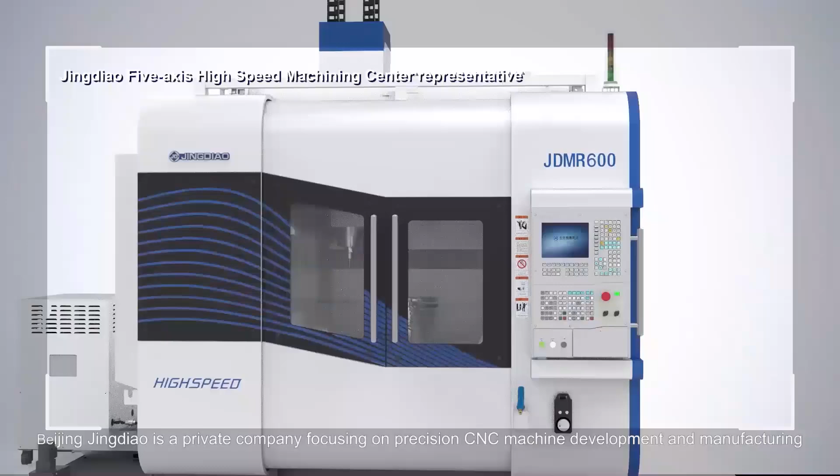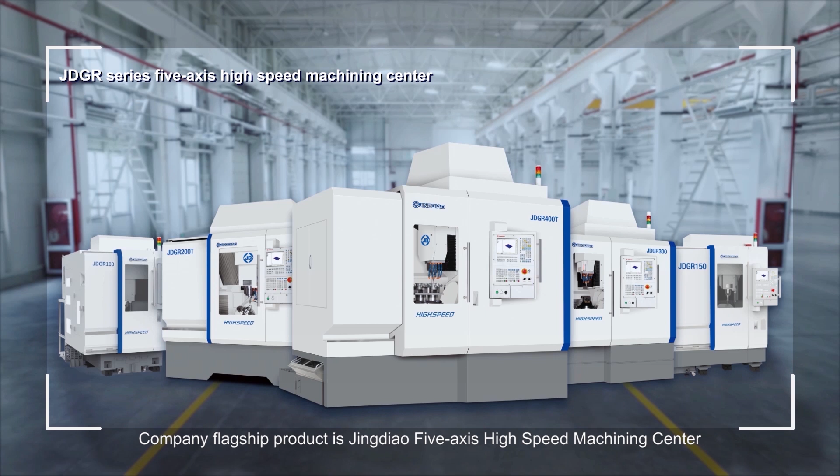Beijing Jingdiao is a private company focusing on precision CNC machine development and manufacturing that was certified as National High-Tech Enterprise in the first batch. The company's flagship product is the Jingdiao 5-axis high-speed machining center.

Beijing Jingdiao Group was established in 1994. Its headquarters locates at Beijing Zhongguancun Mentougou Science Park. Staff number exceeds 4,800, of which over 900 researchers work in the R&D team and over 1,200 engineers work in the technical service team. After over 20 years of tireless efforts, the company has built a well-developed system including R&D, production, and sales. The group was entitled National Enterprise Technical Center in 2019.

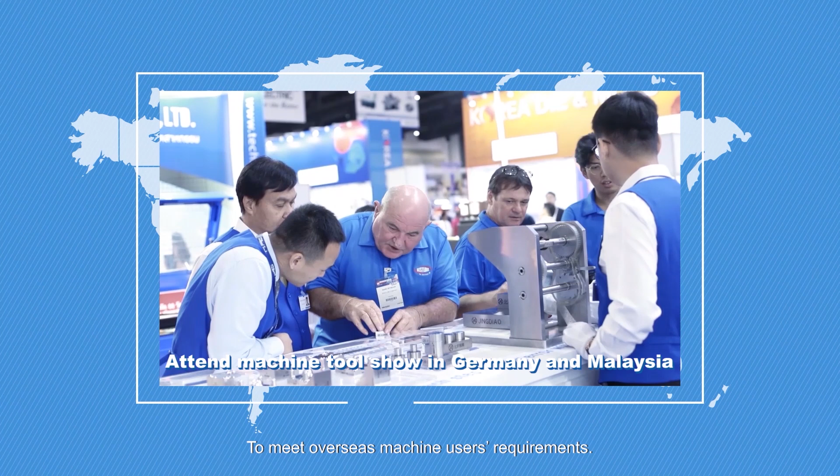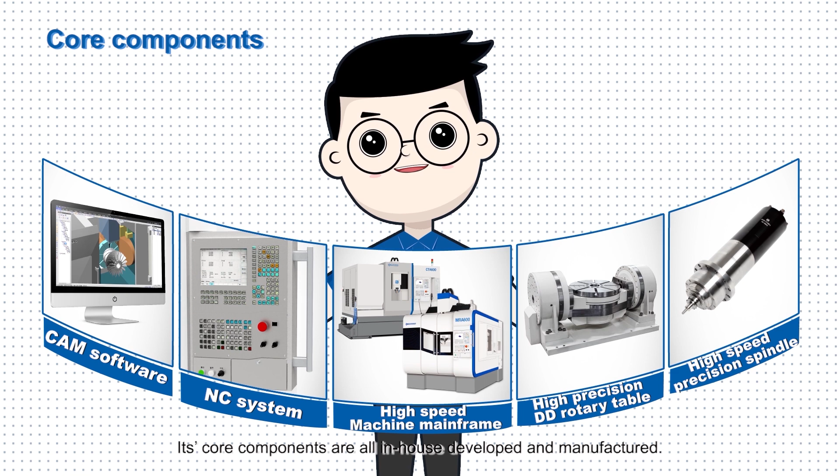The Jingdiao high-speed machining centers are our mainstream product. Its core components are all in-house developed and manufactured. All of its series machines can stably achieve 0.1 micron feed, 1 micron cutting, nano-level surface effect.

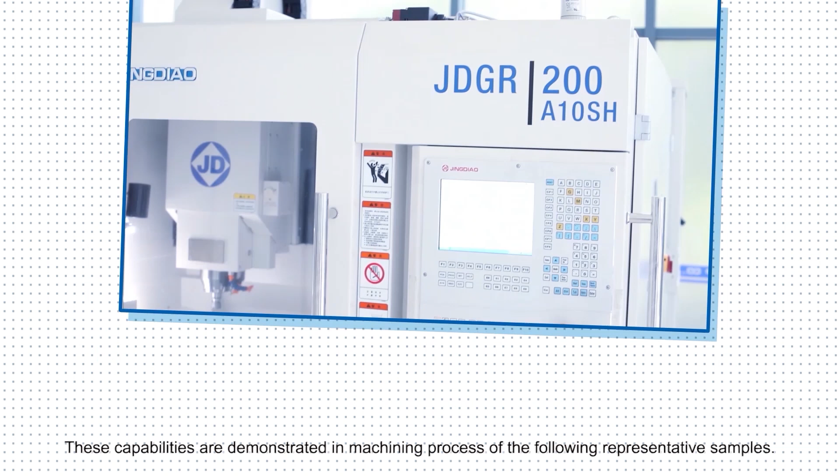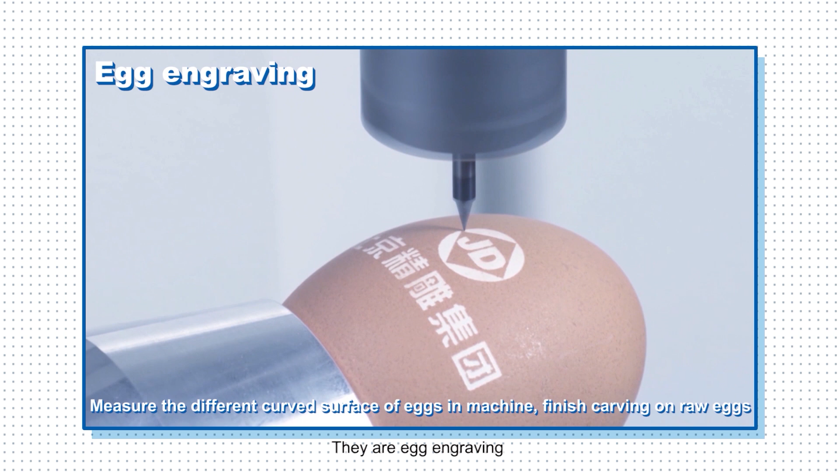These capabilities are demonstrated in the machining process of the following representative samples: egg engraving, micron-level mirror surface test piece, high-precision fitting test piece, and curved surface spiral fitting test piece.

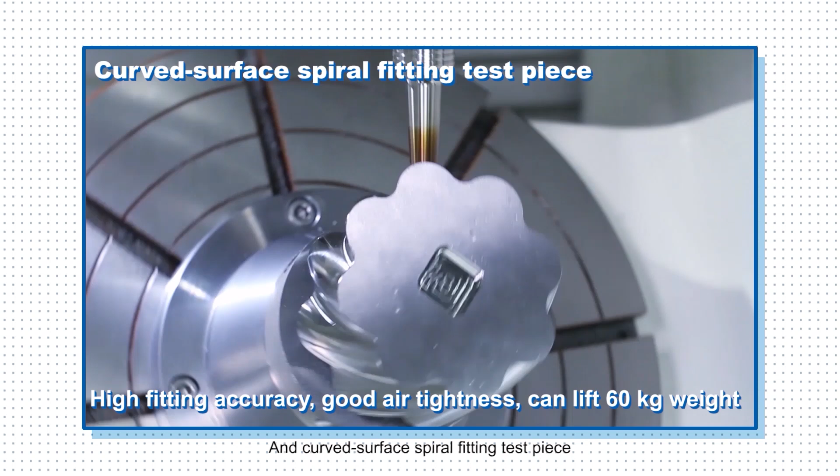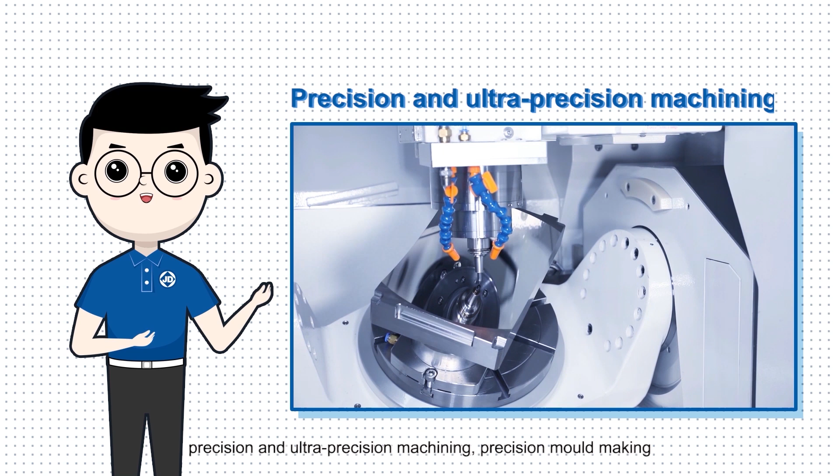Because of such high machining performance, Jingdiao high-speed machining centers are widely used for precision and ultra-precision machining, precision mold making, high-accuracy grinding, and metal parts mass processing, etc.

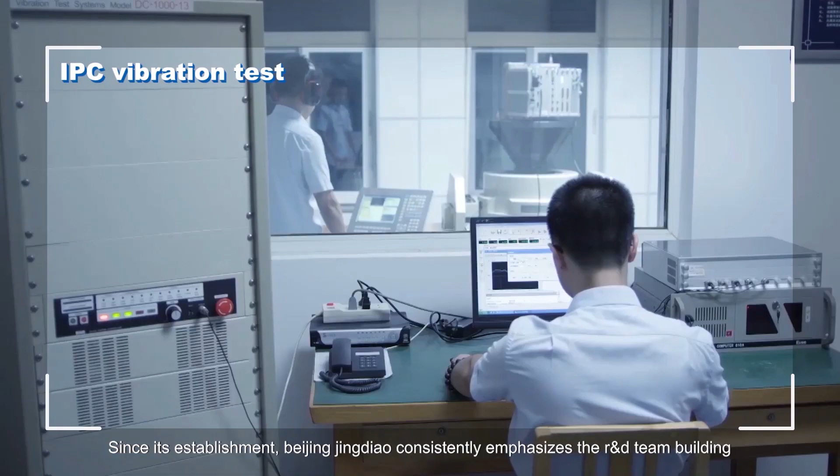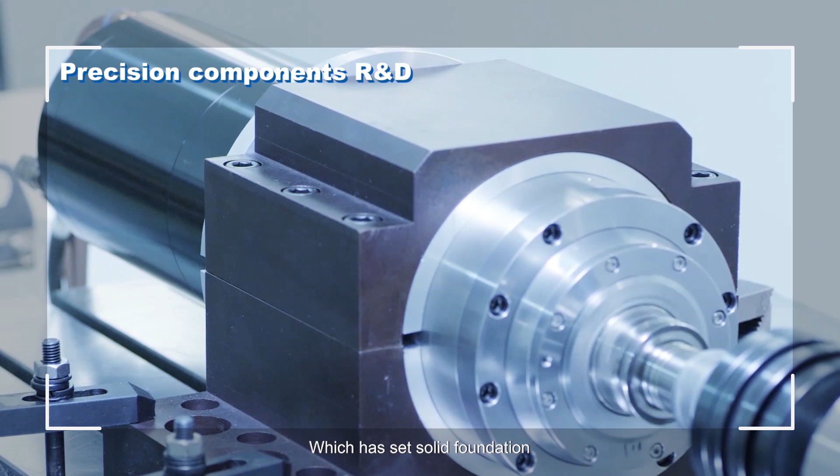Outstanding R&D ability drives Beijing Jingdiao to develop continuously. Since its establishment, Beijing Jingdiao has consistently emphasized R&D team building, insisting on investing over 8% of its annual revenues in technology research. Currently, Jingdiao has mastered core technologies of CNC machine tools and accomplished plenteous R&D fruits, which has set a solid foundation for continuous improvement of Jingdiao machine performance and company growth.

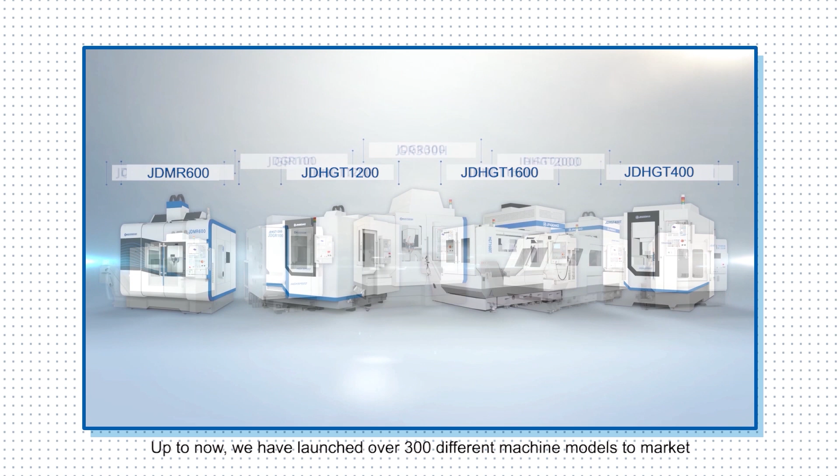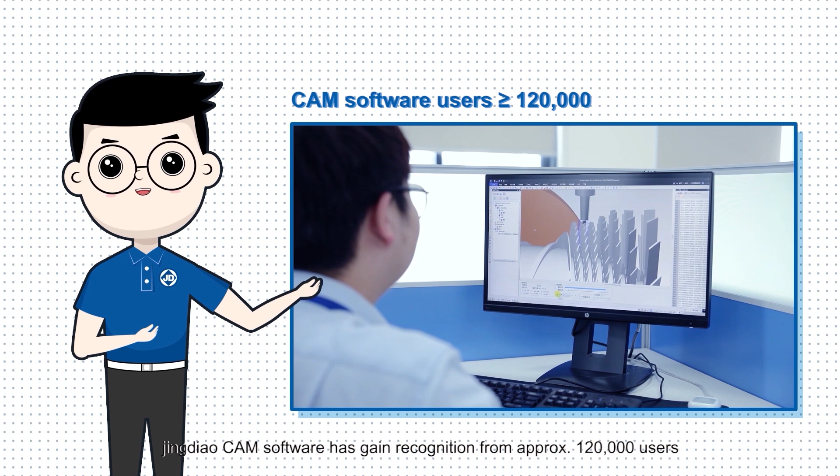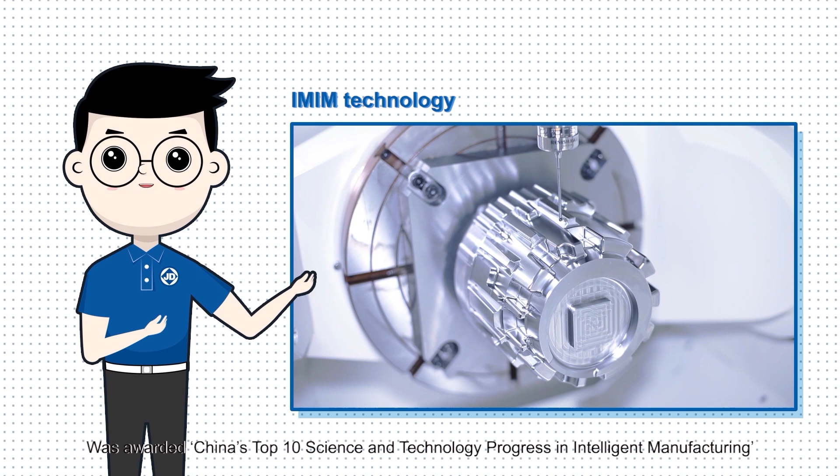Up to now, we have launched over 300 different machine models to market. The installation quantity of Jingdiao CNC control systems exceeds 100,000 sets. Jingdiao CAM software has gained recognition from approximately 120,000 users. Jingdiao's in-machine measurement and intelligent modification IMIM technology was awarded China's top 10 science and technology progress in intelligent manufacturing by the Intelligent Manufacturing Alliance of CAST Member Societies, IMAC.

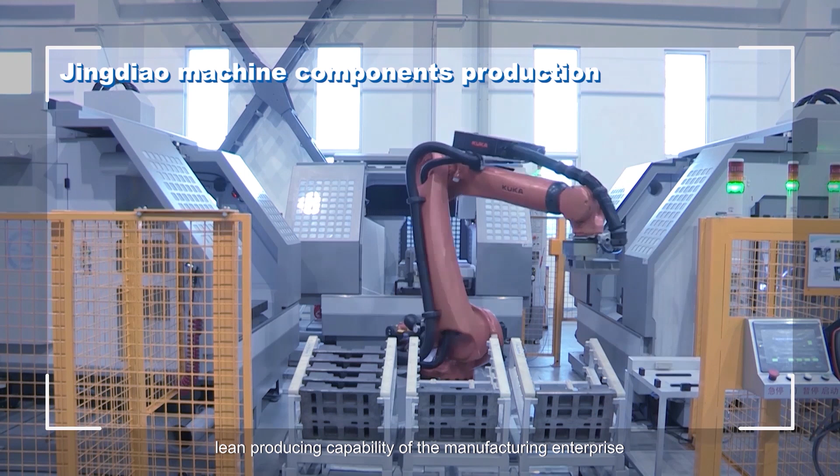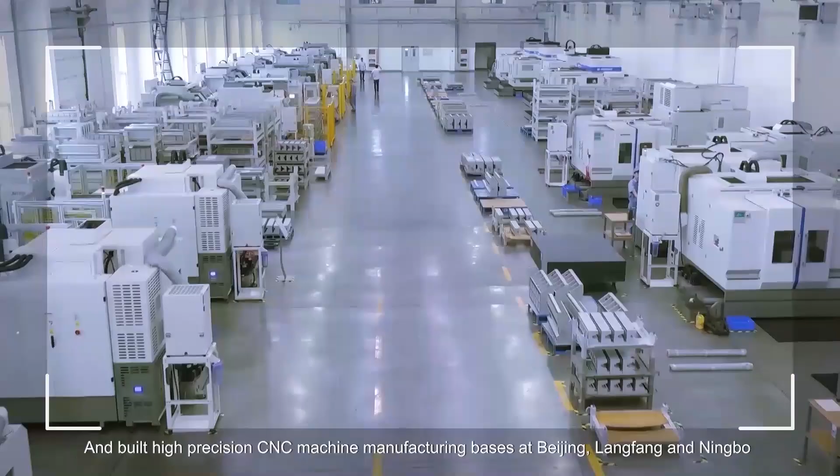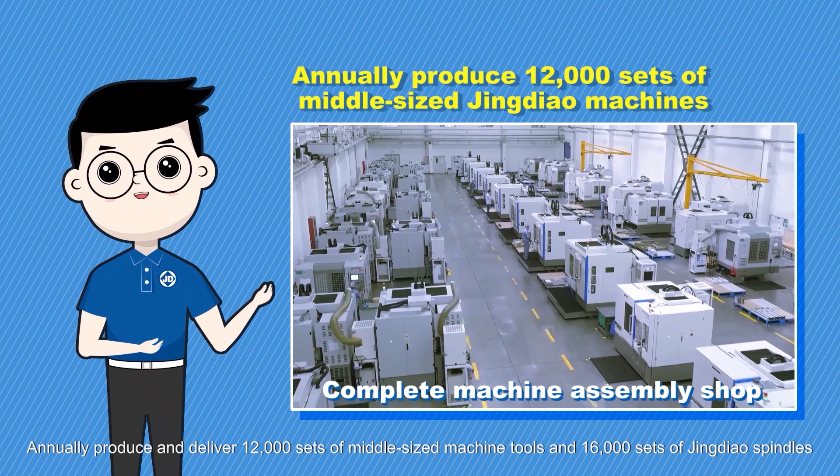The quality stability of high-precision CNC machines relies on the lean production capability of the manufacturing enterprise. During its 20 years of development, Beijing Jingdiao has invested over 4 billion RMB and built high-precision CNC machine manufacturing bases at Beijing, Langfang, and Ningbo, which possess large-scale producing capacity and a lean management system, annually producing and delivering 12,000 sets of mid-sized machine tools and 16,000 sets of Jingdiao spindles.

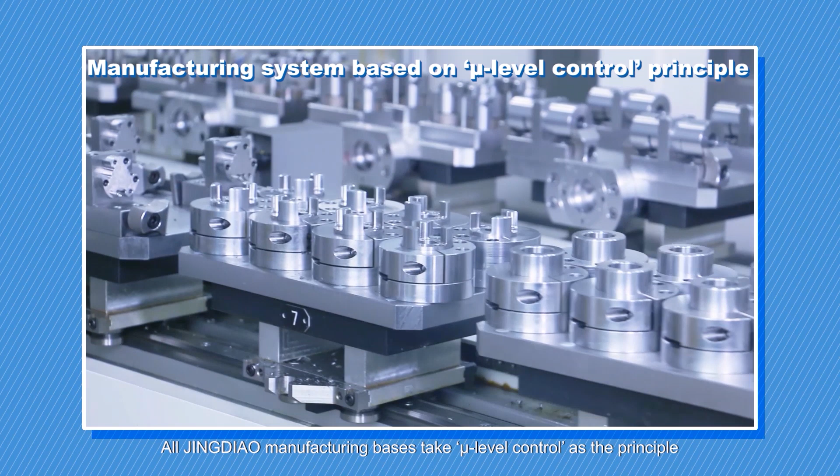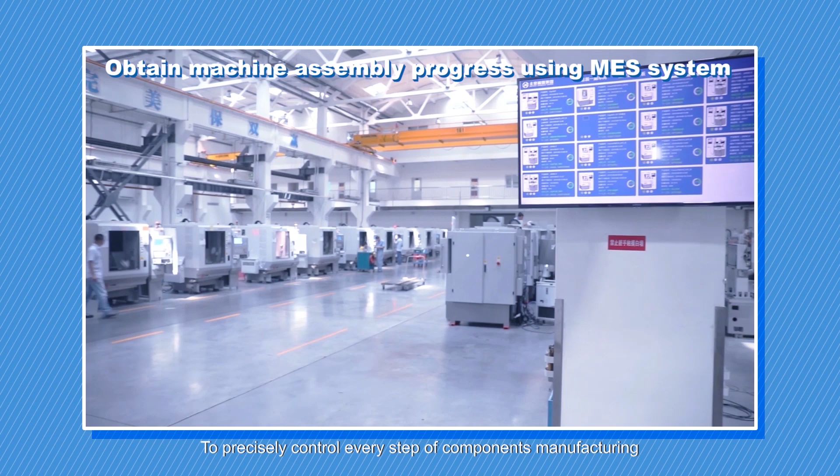All Jingdiao manufacturing bases take micron-level control as the principle, applying Jingdiao's in-machine measurement technology and information management technology to precisely control every step of component manufacturing and ensure every Jingdiao machine is delivered to market with high quality.

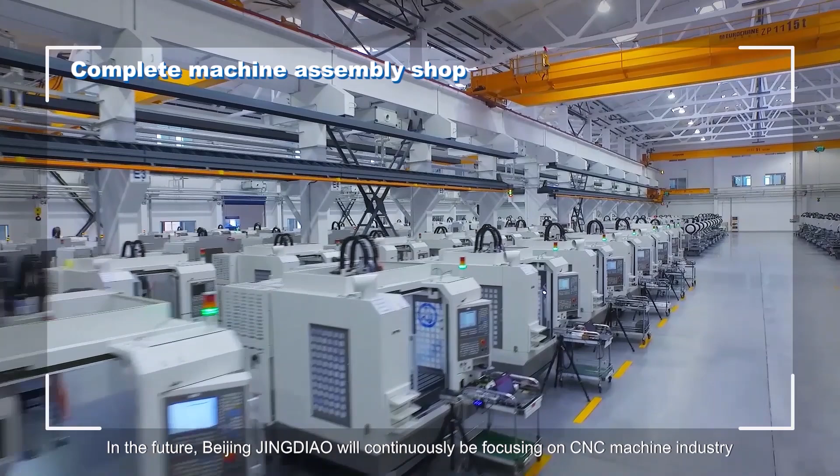In the future, Beijing Jingdiao will continuously focus on the CNC machine industry, refining research and development, making great efforts to become a high-end CNC machine manufacturer and NC engineering service provider.